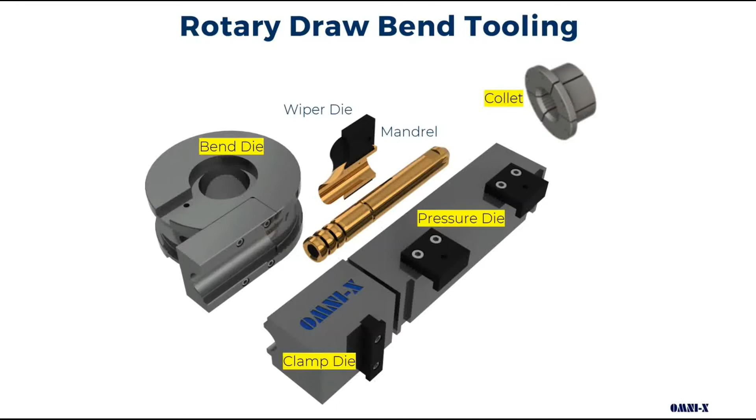The three main durable tools are the bend die, clamp die, and pressure die. These are the universal durable components common to all bending machines and will be the primary focus of our presentation today. The collet, as shown, is a durable tool, but is only needed when bending with a CNC machine.

Roller bend tooling, designed for roll bending machines, also requires the three main durable components of the bend die, clamp die, and pressure die. These dies provide the same functionality in roll bending as they perform when rotary draw bending. Roll bending is recommended when the bend radius is 8 times bigger than the diameter of the tube.

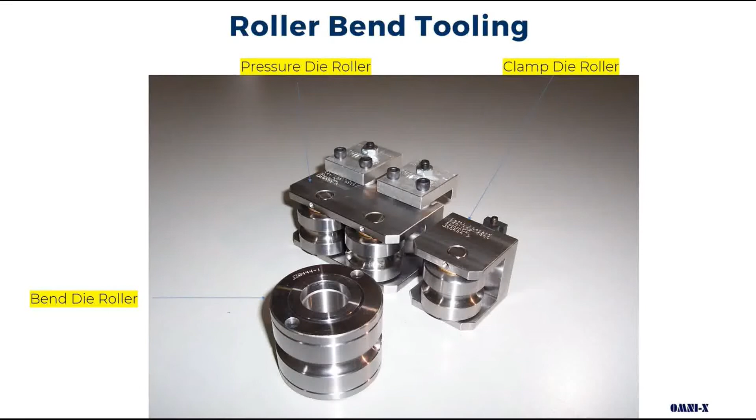Materials. Durable die typical materials are 4140 and tool steel. 4140 is case hardened using the nitride process. Tool steel is through hardened by heat treat process. 4140 nitride is the OMNI-X standard durable material. It is more stable material and requires less post-machine operations after hardening than tool steel.

Benefits for the user: it is more forgiving and tends to mushroom and not crack if crashed with other tooling when bending. The case hardening is actually harder than tool steel at the outer surface. Also, the dies can be refurbished, resized, and case hardened again once you wear through the case hardening, depending on the tooling design.

Tool steel, through hardened, yields its best tooling life in high volume bending applications. These are usually dedicated bender specific parts which after initial setup require less handling and usually just remain on one bending machine. Tool steel is brittle and more likely to crack if dropped or crashed. Therefore, the less handling and less setups minimize these risks.

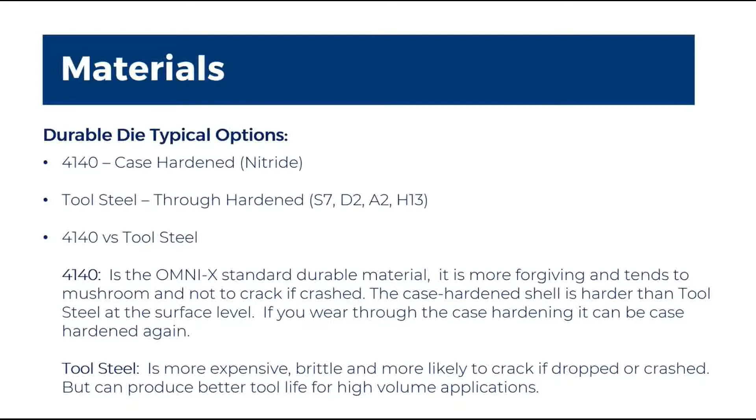Bend die configurations. The bend die is a tool which allows tubes to be bent around it and defines the resulting shape of the tube. Each bend die has a designated grip area. Depending on the bend die style, the grip may be removable.

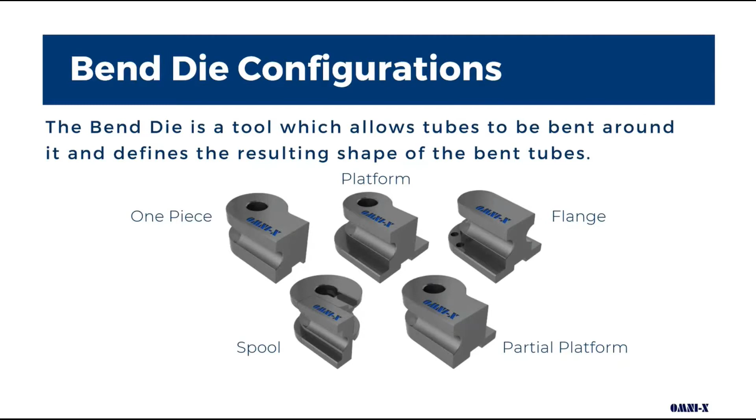There are 5 bend die styles: the spool, one piece, platform, partial platform, and flange. When choosing a bend die style, it is important to consider the application. The best choice will provide the minimal structural integrity required for the bend application performance and machine mounting.

Spool dies are full circle dies with a removable grip. They are the most cost-effective option for bending. They can be made on a lathe, which makes them the most common bend die used. The limitations are grip length must be 60% supported by the bend die. The die must have an inserted grip, and adequate distance is needed for material support between the tool post and insert.

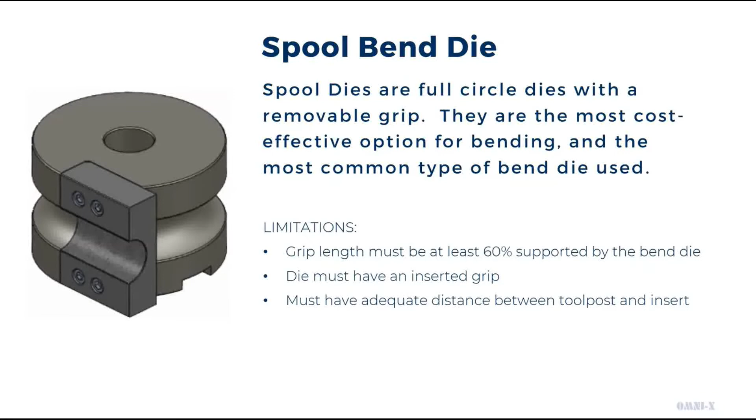One-piece bend dies are solid dies and are offered with removable or non-removable grips. One-piece dies are the second most common style to the spool. Limitations are: it is difficult to bend 180 degrees on 1D bends. 1D is defined as when the bend die radius is equal to the tube diameter being bent.

Like the spool, you must have adequate distance between the tool post and insert if a removable grip is wanted. An integral grip is an option with one-piece die design, which will keep the material needed for structural integrity between the tool post and removable portion of the grip by making the grip area part non-removable and part removable. Another limitation is sometimes keyways may not offer enough engagement for smaller CLRs or bend die radius.

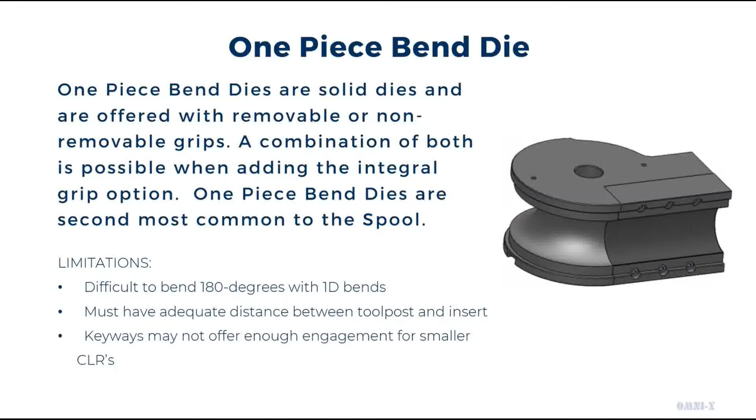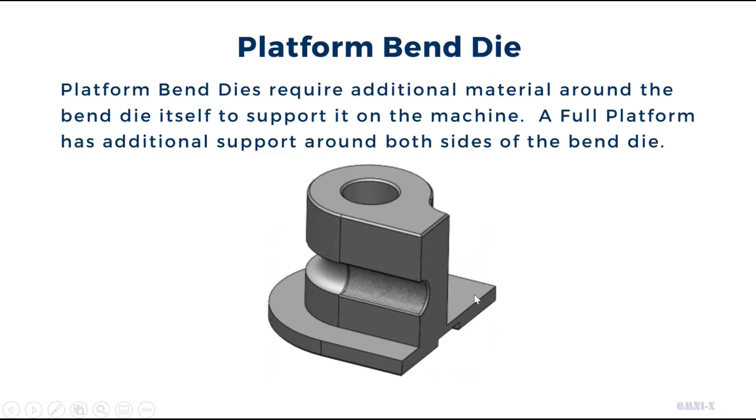We now continue to graduate to alternative bend die configurations for maintaining the bend die durable integrity. Platform bend dies require additional material around the bend die itself to support it on the machine. A full platform has additional support around both sides of the bend die. A partial platform die has additional support on one side.

Flange-style bend dies mount directly to the machine bend head using bolts instead of having a tool post and nut. This is useful for very small CLRs where the tool post will not fit through. Flange dies can be made with a spool or one-piece die on top.

Limitations are: it is not possible to be both-handed or stackable. The flange must be bolted to the bend head, and if the bender has a drop clamp, there is a possibility of interfering with the flange.

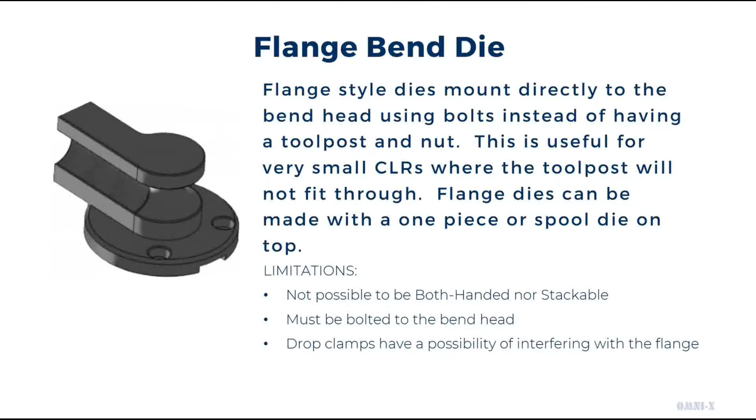Gripping surfaces: the gripping section grips the tube during the bend. It is often made separately and attached to the bend die. The grip length of the bend die depends on the parameters of the tube and usually has a special surface treatment. The surface of the clamp has a significant impact on the functionality of the tools.

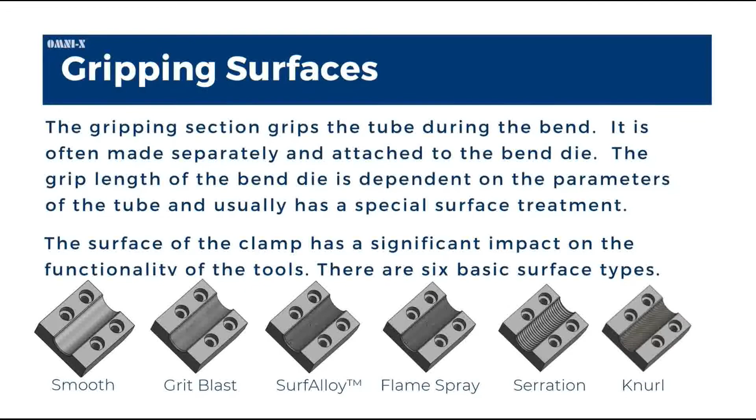There are six basic surface types: smooth, grit blast, Surfalloy, flame spray, serration, and knurl.

Smooth grips have no surface treatment, used primarily in applications where it is necessary to take care of the visual quality of the tube surface. This option is used commonly in the furniture fabrication industry. Smooth grips require a 4D recommended minimum grip length, or 4 times the diameter of the tube.

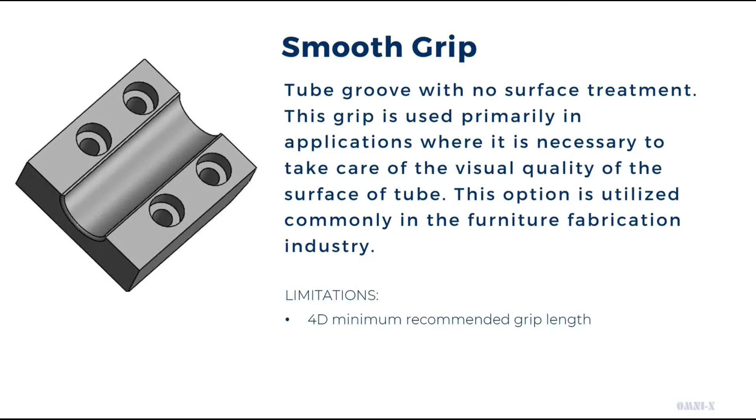Grit blast is a gentle roughening of the functional surface of the clamp. The advantage of grit blasted clamps is they do not lower the quality of the outer surface of the tube after gripping. OMNI offers grit blast as its standard surface treatment, and it can be reapplied. Grit blast requires a 3D recommended minimum grip length.

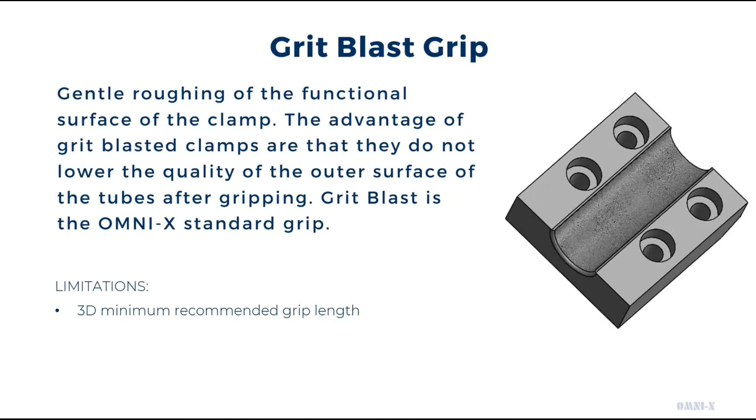Surfalloy is a carbide-based arc spray treatment that achieves greater roughness and can be reapplied after wear. OMNI recommends producing the diameter of the groove to the nominal diameter of the tube. This has a positive effect on the gripping surface and allows us to shorten the length of the clamp.

Limitations of Surfalloy: a 2.75D minimum grip length is recommended, and it leaves a medium marking on the bent tube.

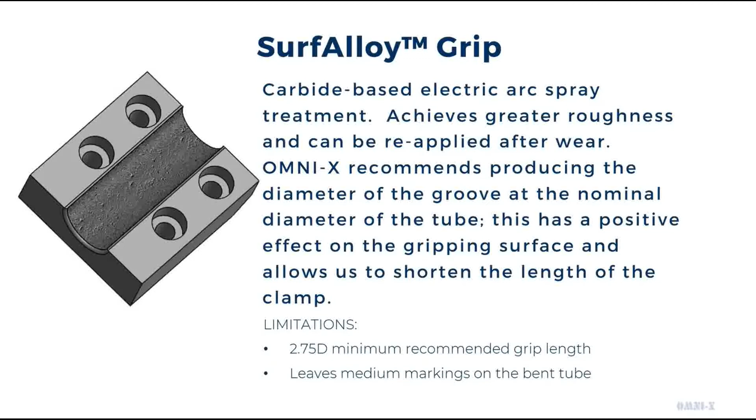Flame spray is a buildup of tungsten carbide by about 5/1000ths of an inch, creating extra pinch and more grip than Surfalloy. It can also be reapplied after wear. The more aggressive grip surface allows us to shorten the length further than the previous choices. Now 2.5D is the minimum recommended grip length, and the markings will be more pronounced than that of Surfalloy.

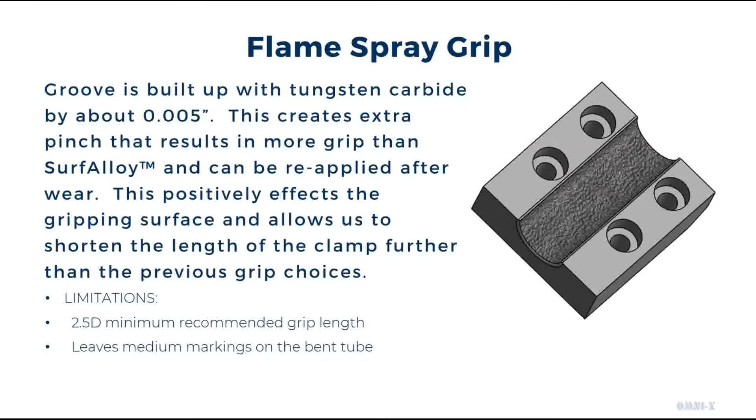A machine serrated grip allows significant clamp length reduction. The coarseness of the serration is set by the number of teeth per inch. We typically use 16 or 32 teeth per inch.

Limitations: a 1.75D minimum recommended grip length, and it will leave heavy markings on the tube. The serrated clamp must be replaced when worn.

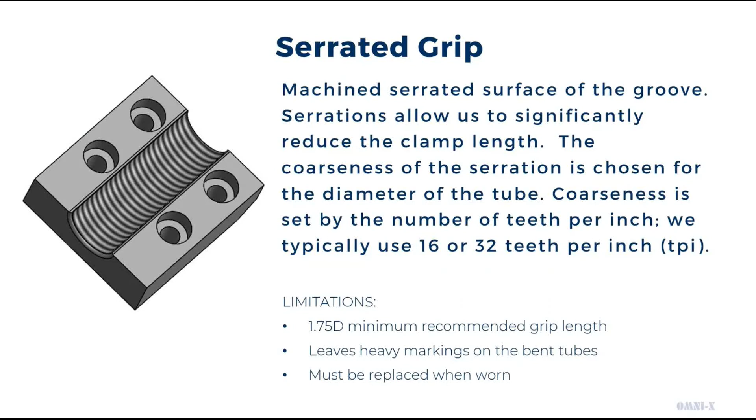A knurled grip is an alternative to the serrated grip, but has more limitations. The heavy markings left behind on the tube appear as dimpling versus the linear teeth marks left from serrations. Also, knurl has the same 1.75D minimum grip length requirement. Knurling can only be applied in straight clamp sections and must be replaced when worn.

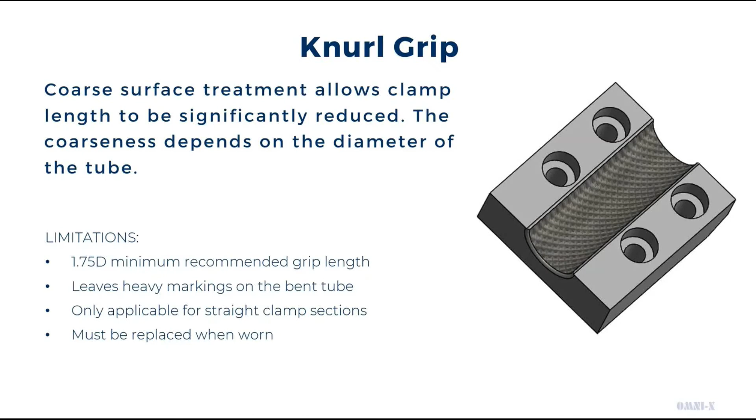We now turn our attention to the role of the clamp die, which is to apply pressure between the tube and the clamp area of the bend die to hold the tube firmly during the bend. A solid grip on the tube is necessary for successful bending. Any slippage will have a significant negative impact on the quality of the tube, resulting in scrap.

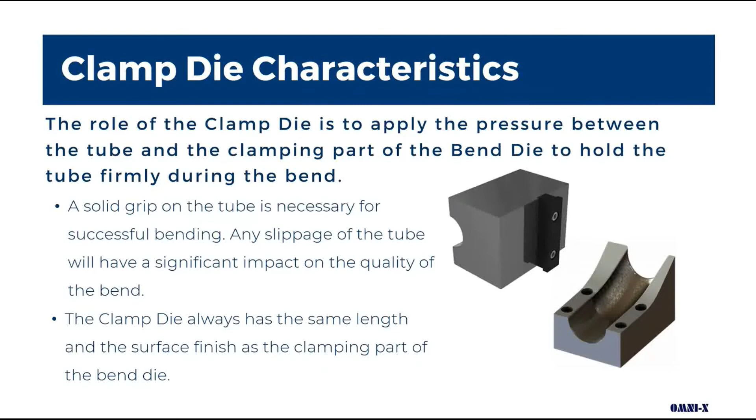The clamp die length is the same as the clamping part of the bend die. A straight clamp die is needed for all tool sets. A compound clamp die is needed when the straight distance between bends is shorter than the recommended grip length, or on a bend-on-bend application with no straight between bends.

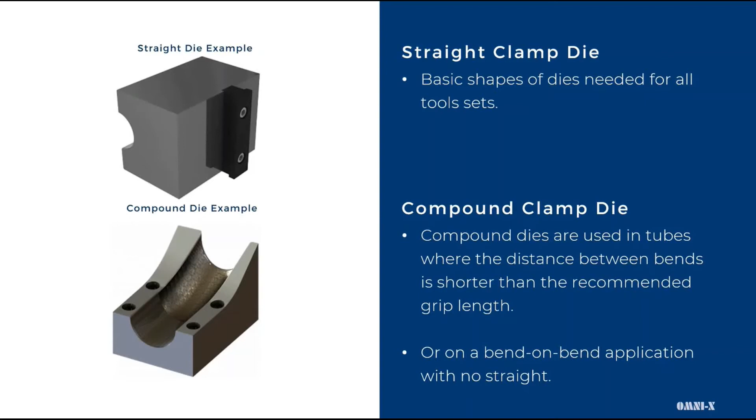The third primary tool, common to durable tooling, is the pressure die. The pressure die maintains constant pressure between the tube and bend die throughout the bend. Moving with the tube, it determines the point of bend, also called the tangent point.

Sometimes referred to as a follower, the pressure die can be flipped to extend tool life, but this is dependent on the machine mounting. The pressure die length is determined by both the bend radius and the degrees of the bend.

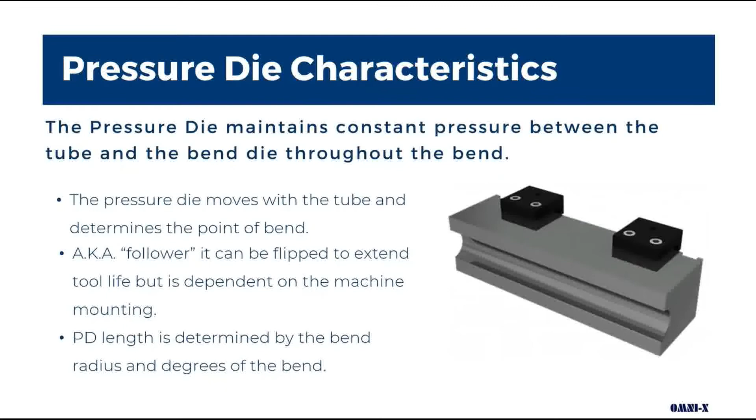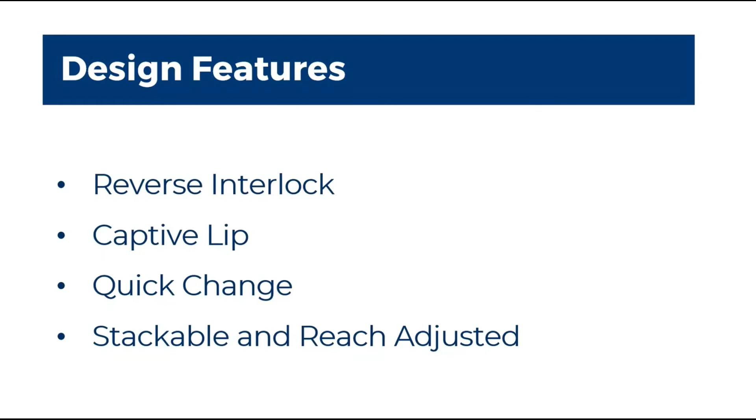There are optional design features that can be applied to durable tools. They are reverse interlock, captive lip, quick change, and stackable and reach adjusted.

The reverse interlock feature gives the bend die a recessed channel for the clamp and pressure die to lock with vertically. This improves tooling alignment during the bend process, eliminating marking caused when tools are misaligned. Limitations: interlock is not recommended if the material that remains above and below the interlock channel is less than 1/4 inch.

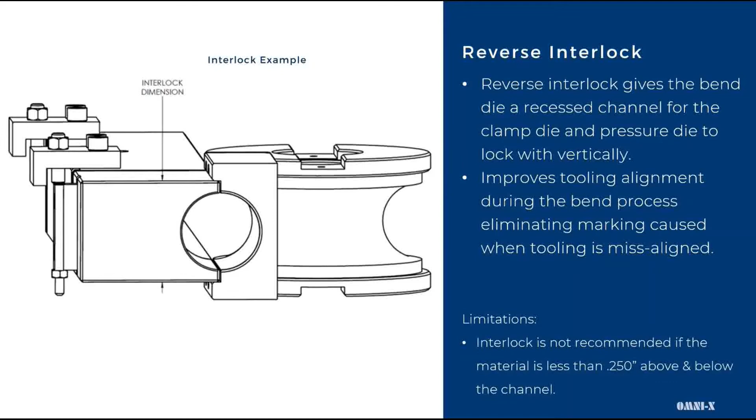Captive lip is a feature added to bend dies and wiper dies for cosmetic bend applications. The lip extends past the tube's vertical center line in order to reduce marking on the top and bottom of the tube. As you can see here, this red area is past the center part of the tube, and that would be the extended portion, or the extended lip.

The pressure die must be cut back by the same amount in order to not collide with the bend die. A limitation is you cannot use non-lip tooling with lipped tooling.

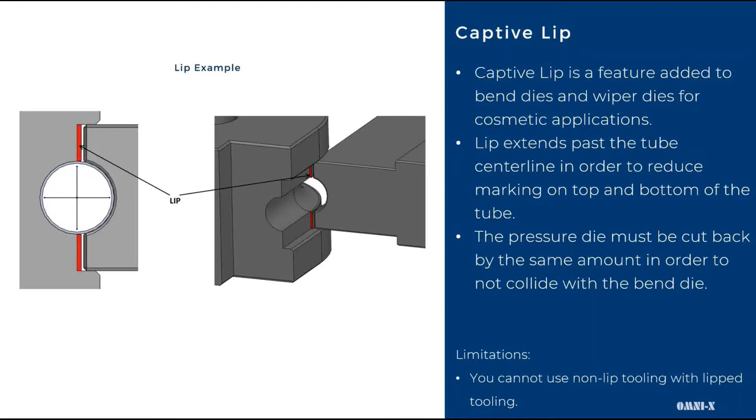Quick change is another feature which, through the use of pins and magnets, allows grip sections to be quickly interchangeable. This is especially useful when combined with compound grips. A limitation is when the tooling is too large, typically over 3.5 inch diameter. These tools require very strong magnets, making the inserts hard to remove by hand, and is not recommended.

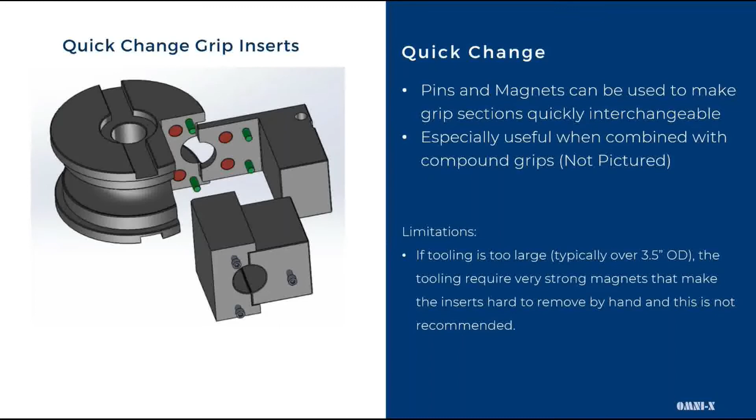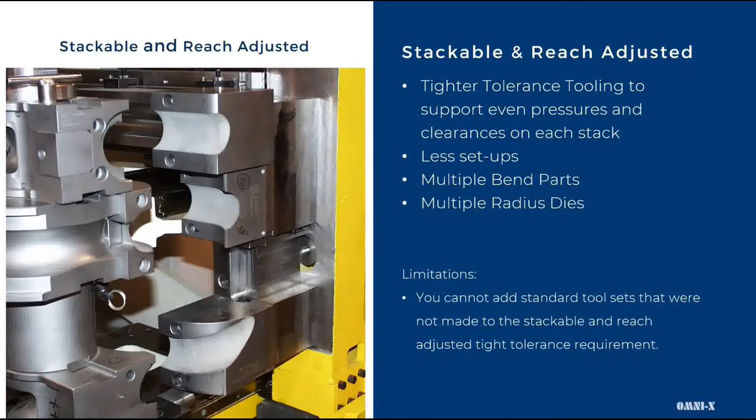That concludes the durable tooling overview presentation.